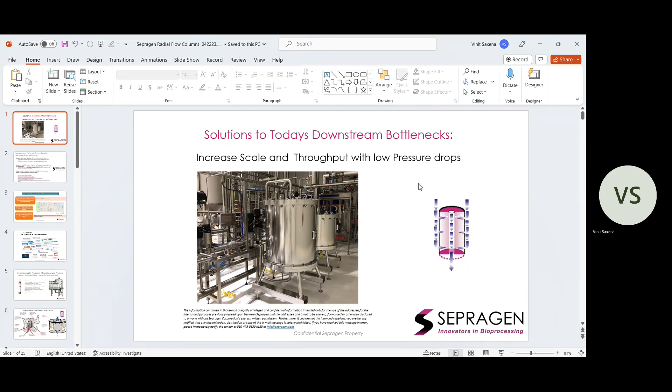So today's talk is about how to improve column throughput while maintaining low pressure drops as you scale up your chromatography. So it's a very vexing problem because many of us all through the industry do process development on a small scale, little HiTrap columns or other columns like that sometimes. And everything seems to go well.

And we are simply magically scaling these columns up to 10 centimeters, 20 or 30 centimeters, then eventually to 1 meter columns. And very often, unbeknownst to the people that develop these separations, they encounter significant problems when these separations are scaled up to pilot or large scale. And that is the worst time to be encountering problems, whether it's with column packing, whether it's with high back pressures, then the skids are not able to handle it, etc.

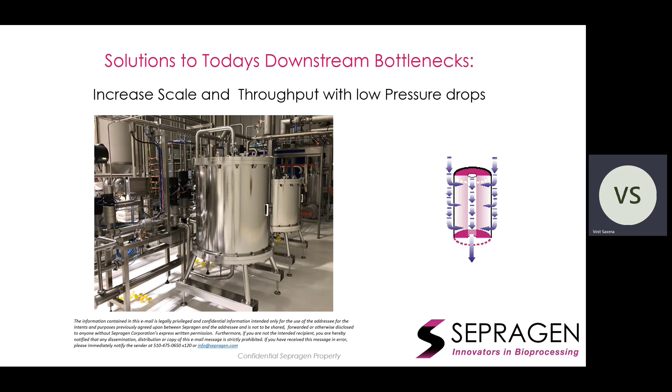So these problems are not new. Many people are familiar with it. And then it hits the timeline, hits the productivity and throughput gains from that particular plant. So we are going to address those problems.

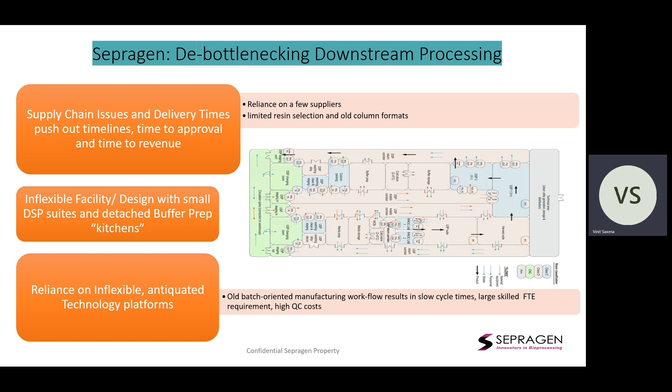And we come from a base of experience because while many of you may not be familiar with radial flow chromatography that I'm going to talk about now and how it addresses this issue, many of you are. And this technology is proven out there. For some of you, it may be a new concept, but many others have tried it, and there are a whole host of drugs using these. And so many companies have many lines using this technology. And certainly the FDA is familiar with it. But we'll go through it in a stepwise manner today.

And so first, let's kind of define the problem. Chromatography problems, throughput and pressure. What can radial flow, Superflo columns do? Well, on the left-hand side is a conventional column that many of you are used to. No big deal, small column, pack it with resin, push the adjuster down, and you pretty much run 100, 300 centimeters per hour, few minutes residence time, 2 minutes, 3 minutes, 4 minutes, 5 minutes residence time. Everything looks good.

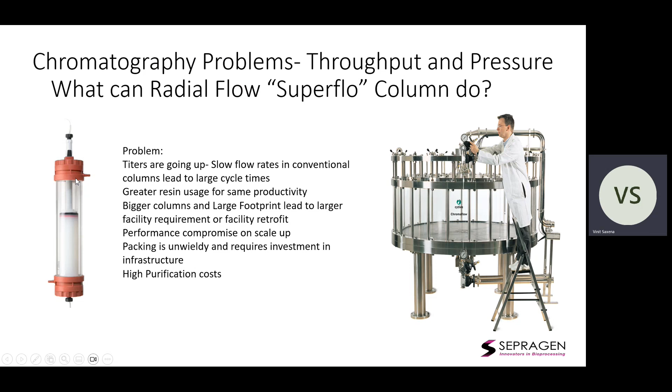So enter radial flow chromatography. So some of you who are not familiar with it might be asking, what is radial flow? Well, everyone knows what conventional chromatography or axial chromatography is. Doesn't really need a lot of explanation. You have an adjuster, the flow comes in through the top. There's a frit on the top of this column, at the bottom of this adjuster. And there's a frit on the bottom, and the resin, this white stuff, is sandwiched between these two frits. That's it. So the flow takes place axially along the axis of the column.

Well, radial flow kind of switches that paradigm 90 degrees. And how do we do that? Well, in these columns, the flow comes in through the inlet, in which the radial channels distribute the flow, not disperse, but distribute the flow to the entire periphery of the column. So inside the column, but the periphery of the column. And so inside the outer wall of the column is a porous frit. So instead of there being a circular frit on the top of the column, there's a cylindrical frit on the outside. There's a cylindrical frit on the inside of the column, inside which is a solid core.

So now the resin is held between these two inner and outer frits. So what you do in this column is essentially direct the flow. Instead of being distributed on the top of the column and going through the resin bed, coming out the bottom, here the flow is distributed to the entire outside wall of the column.

And then your sample travels through the outer frit, through the resin bed, through the inner frit. And of course, inside the inner frit is a solid core or hollow cylinder. And so between the wall of the inner frit and this hollow cylinder is a narrow channel, and it comes out the bottom. So the area over which now the flow is applied is not the pi r squared, but it is the area of the wall, which is the 2 pi RH.

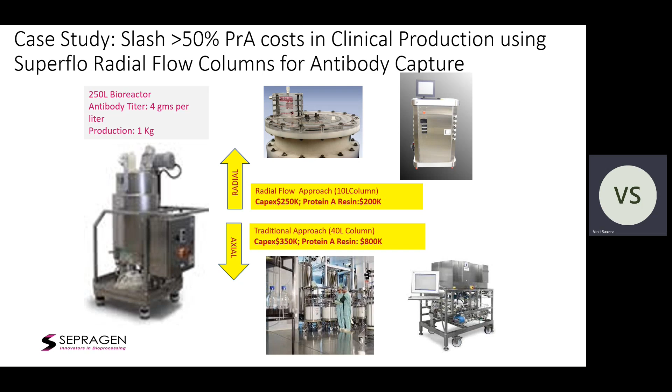So radial flow columns have a benefit even at the pilot scale. Because of their high throughput, you can save time, have lower back pressures, and certainly even save expensive resin. Now you might say, well, you're going faster through the column. I'm concerned that you're going fast through the column, and what is it really doing for the binding capacity? Am I going to have the same recovery?

Why? Because these beads were cross-linked beads, and the sites were well inside the bead. So it took the large molecules a lot of time to diffuse inside to the sites and then come out. So the mass transfer limitations were very high. That meant that if you went very fast through this column bed, not all the sites would be available to the protein for binding.

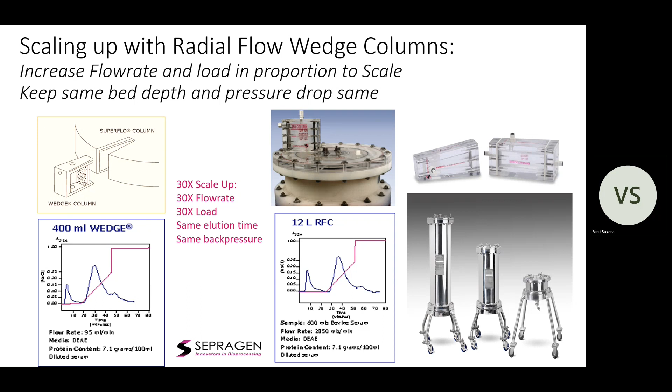And then you might say, well, that's great. I can see how you can reduce the back pressure. Sure, it looks like you're able to go much faster. But this is a problem that we really see at clinical stage. I'm seeing that with our clinical, but isn't it too late to change from axial to radial? Maybe we'll do it on new products that come along.

Well, no, it's not too late. That's a fallacy. People say that about resins because that directly impacts CMC. You write down in your CMC application that you're using this resin and you're using these buffers and you're flowing at this flow rate, etc. But if you were to change a pump, you would do that without blinking an eye, right? Or if you were to change a valve.

So this is a hardware. If you were to change a tank, you wouldn't think twice about it. Well, this is a hardware change. And unless specifically written in your CMC application that you are to use an axial column, there's nothing that's precluding you from making that switch.

So here's a test case that we talk about. Here's an actual case, a case study. This is a customer, Chiron, today's Novartis, but at that time they were in phase 2 of making a well-known growth factor, which is now approved. So they have 2 of these that are FDA approved.

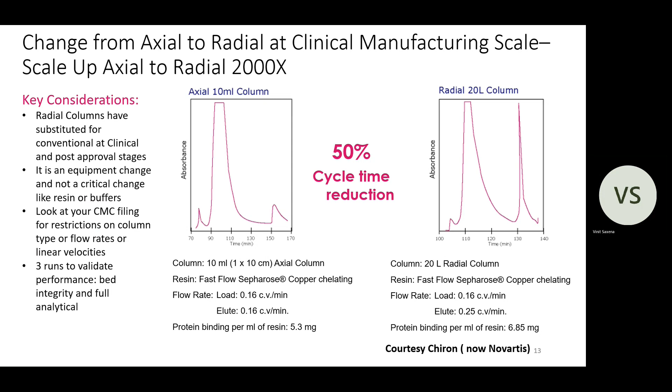And then suddenly you'll see the pressure spike. Pressure will go up anyway as the bed is being created, but then it suddenly spikes, and that's when you stop the column packing. Then you close the packing and unpacking ports, run the column in the forward direction and in the reverse direction, and stabilize the bed.

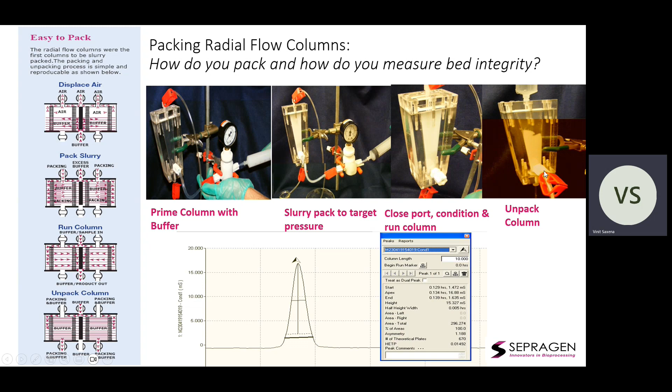When it's fully formed, you stop packing, close this port, and simply run the column. Okay? And when you want to unpack it, you pump buffer through the top, open the packing port, and the bed slurries and comes out. So very simple.

Of course, we have medium size columns, process columns, large production columns. You can't pack those with a syringe. So you have packing systems; you have diaphragm pumps you can use to pack the slurry into the columns. And we have automated systems for 5, 10, 15, 20, 50-liter columns. If they're using explosive solvents like ethanol or IPA in the slurry, we have explosion-proof versions of these.

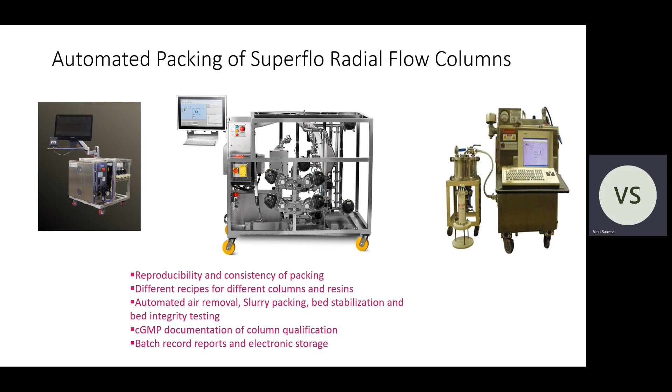For very large columns, like the 100-liter columns we showed you, we have large packing systems where you can simply make a recipe, just like a chromatography recipe. Different packing recipes can be stored with different set points and back pressure; the column will start the packing, stop the packing, be automatically primed, packed, and the bed stabilized. Sensors check the HETP and asymmetry and tell you whether you passed or failed, and you get the entire GMP batch record, an electronic record for that packing, based on 21 CFR Part 11 compliant software.

And of course, these columns have now been scaled up to very large scale, whether it's the 30 commercially approved biologics, mAbs or vaccines, or human plasma fractions, up to 20,000 liters. These large columns you see are Superflo radial flow columns. On the left-hand side are 4 columns running in parallel, processing a very large batch, so tens of thousands to hundreds of thousands of liters.

On the right is a very interesting industrial installation with multiple size columns running in parallel. For instance, one is a 350, the other is a 250, so 600 liters of column capacity, no problem at all. We have large installations of radial flow columns isolating nutraceuticals like lactoferrin from milk or skim milk, running 1 million liters a day.

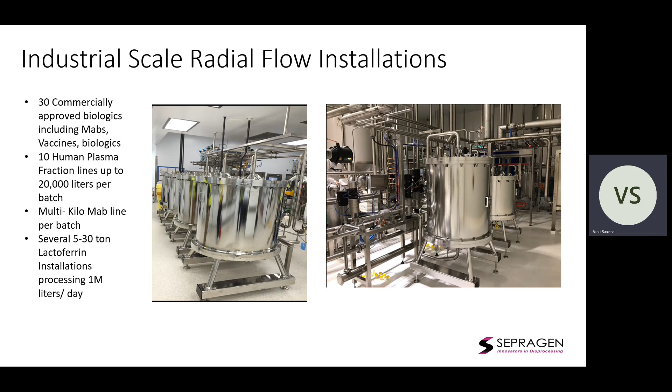Now, of course, these are very large installations. And just a little bit, so these columns, you can use anyone's skids with these columns, anyone's systems or skids. But if you find you're limited in terms of the ability of those skids to run at higher throughputs, we certainly make chrom systems as well.

And then if you're using pre-packed columns or interested in pre-packed radial flow columns or not, you may be using other people's columns. We also have a line of single-use chromatography systems, meaning that the entire flow path, including all the sensors and all that, are disposable, all come pre-assembled, pre-sterilized, and again, very easy to use software, very easy to change the flow kits, and very low hold-up volume, low footprints.

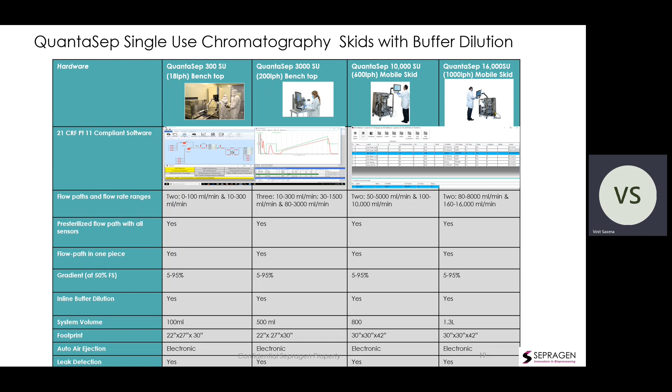And then we're talking about high throughput, high productivity. You can use radial flow columns, but many people are going to continuous processing. So again, in continuous, whether it's two column, three column, or four column processing, if you're having the flow through from one column going to the next, the radial flow columns are very good. They can be used to give you the high throughputs without the back pressures.

They're ideal for that. And then we also make these continuous chromatography systems. On the right-hand side, you see a three-column bench scale continuous system, and on the left-hand side, you see a 600 LPH continuous three-column chrom system, complete with software and everything that we provided for large-scale manufacturing. And these come incidentally with the innate ability to create their own buffers.

So if you're doing continuous production, you don't have to make huge amounts of buffer because you can just use the stock acid and base component of the buffer, concentrated acid and base components, and then the salt, and all of them will blend in together to give you a 1x buffer, whether it's an elution or wash solution buffer with the right pH and conductivity. So this P&ID diagram shows a running screen of one of those runs.

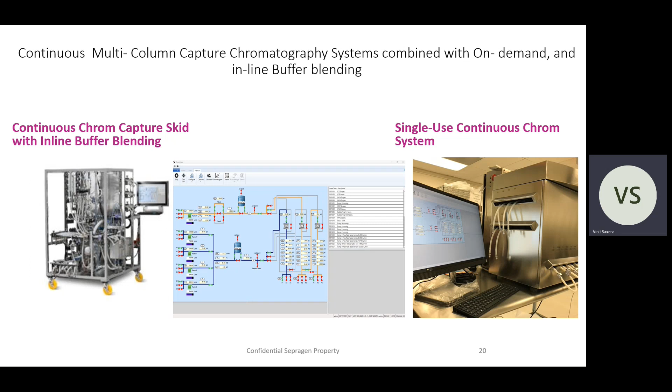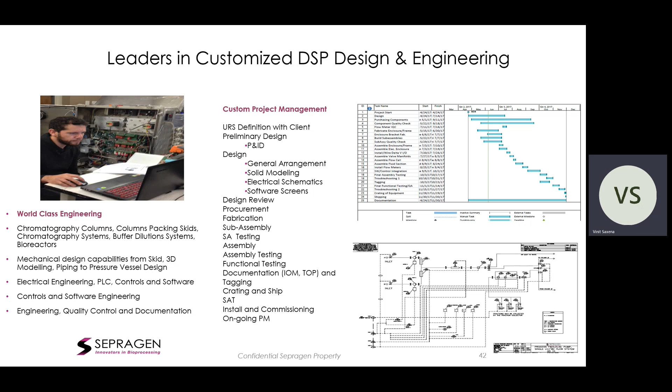And then we do a lot of customized project management. So everything from custom skid development to customized columns. And we work with you on a project basis. And we have, again, mechanical, electrical, software team. We do a lot of our own manufacturing and assembly. So we can certainly work with you on timelines.

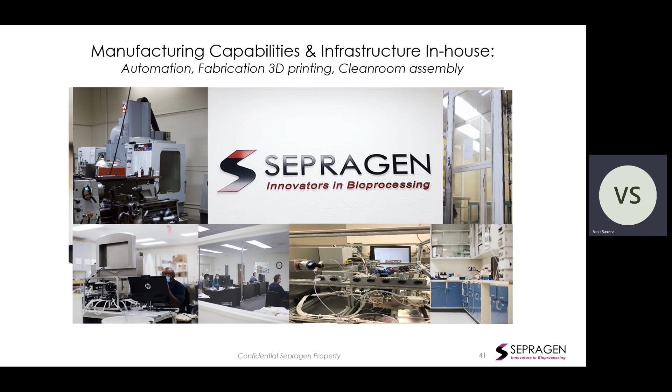There were some projects during the COVID era where we helped the company scale up their vaccine production from 40 million doses a month to 200 million doses a month. And we did that in 18 weeks in one case and 13 weeks in another case. So we have a lot of our own internal in-house capability that enables this level of flexibility, nimbleness, and speed. And then we provide you with full-blown GMP support, whether it's FAT, SAT, IOQ, a complete doc package, all the GMP test certificates and all that you guys might need.

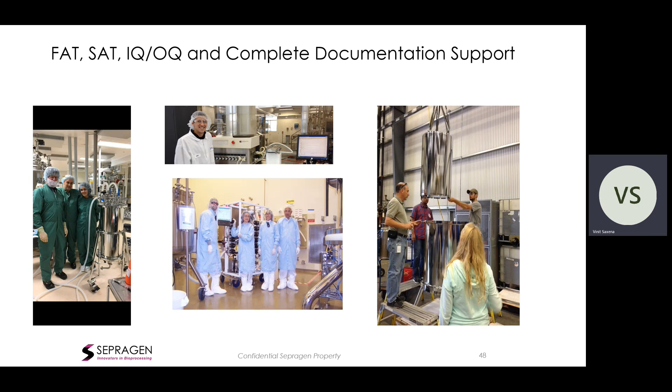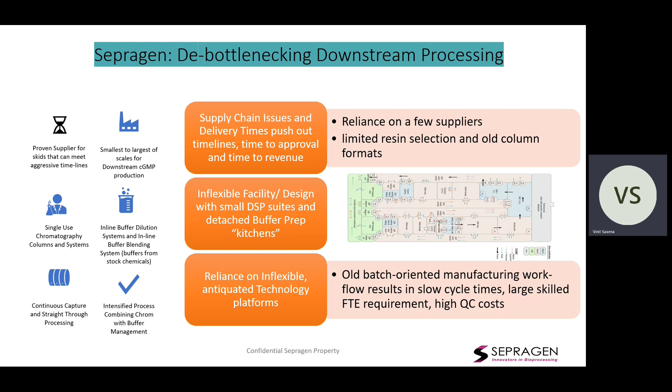And our goal eventually is just to help you debottleneck your process, speed it up, and whatever is blocking you, whether it's pressure issues or footprint issues in your plant that reduce the productivity or reduce the workflow, create bottlenecks, those are what we are out to solve, and we are your partner in that.